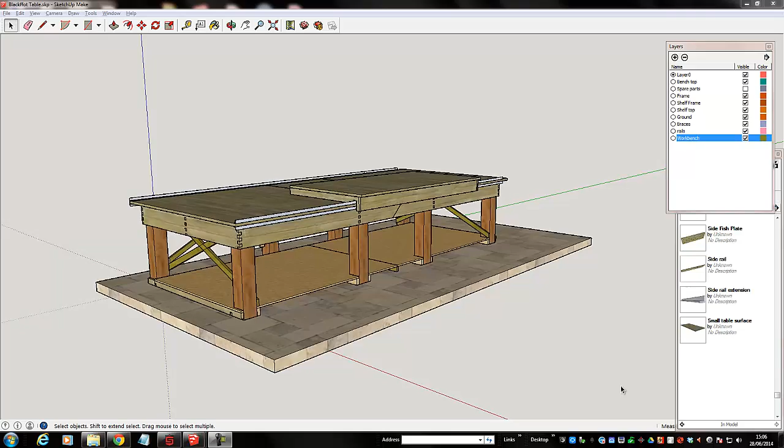I said I would send you the SketchUp model of the CNC bench we've got to build, and here it is. Fairly chunky looking thing, as you can see. The top is made out of 18mm ply. Actually, as the model stands at the moment, most of this framing is made out of 18mm ply, but I'm beginning to wonder whether that's not too expensive a way to go.

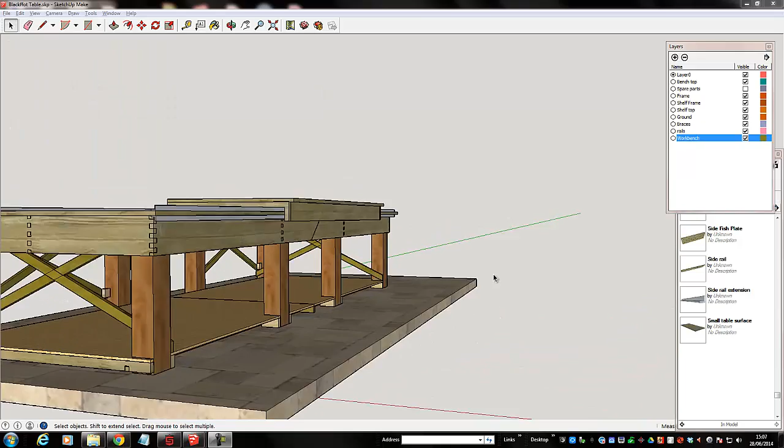A lot of it could be done with 2x1 and 4x1 instead. But anyway, I will show you the model and how it works.

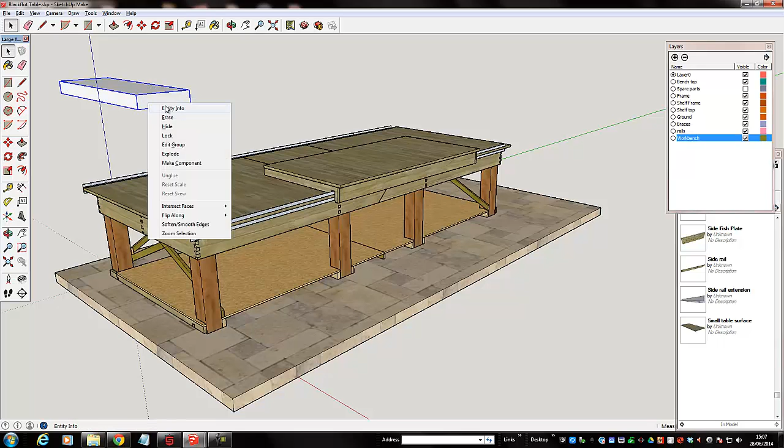In SketchUp, it's a good idea to have things in layers. You create layers, and the way you put something in a layer is if you make some sort of shape like this, we triple click it and make it into a group, which is always a good thing to do. If you then right click it, you see entity info, and down here there's a list of all the layers, and you just say I want to put it in whatever layer you want. The advantage of doing that is that you can selectively hide things.

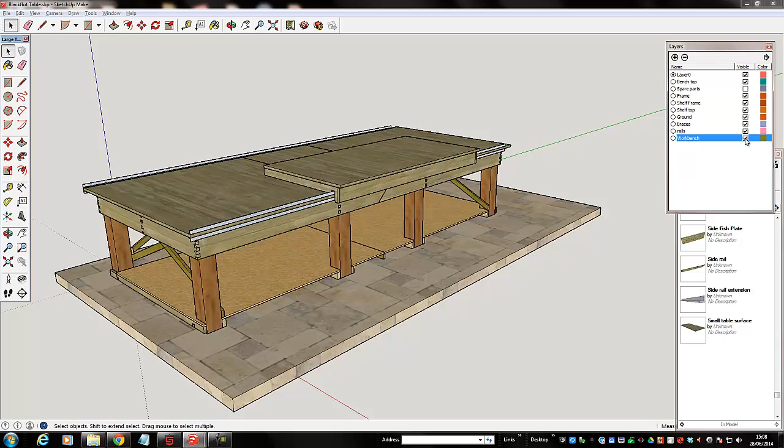One of the thoughts I had, having made this great big 10-foot long by 52 inches wide bench, is that it's a shame you can't really use that big flat horizontal surface for doing things, for fear of damaging the rails, which are pretty delicate. So I made this thing which I call the workbench, which merely sits on top, and in SketchUp you can use the move tool to move that about into different places, and then go and look underneath it and see how it's made.

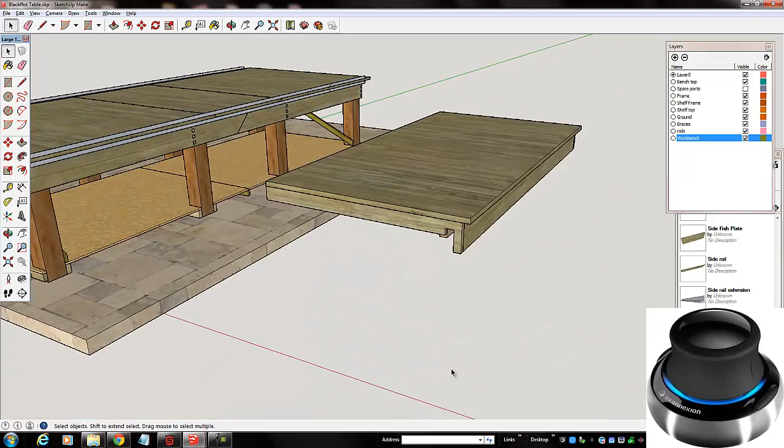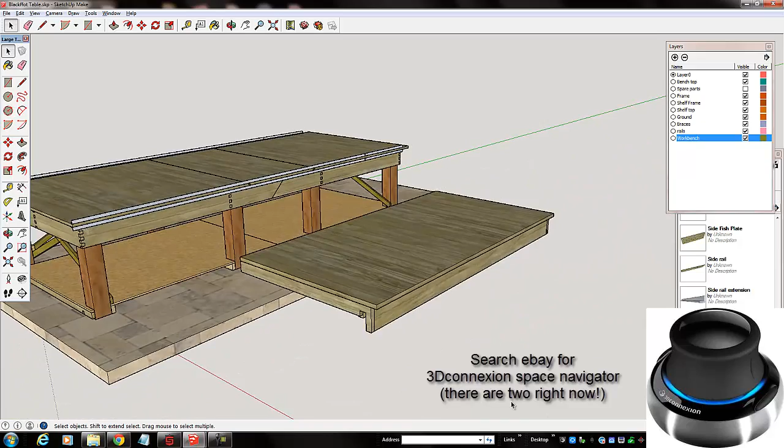I'm using a special tool here, and if you're going to do any work in this, lash out some money. I got mine on eBay secondhand - look for a 3Dconnexion 3D mouse, because all this moving around I'm doing with my left hand with the 3D mouse, which leaves my right hand free to do other things I want to do.

So I'm not going to save any of the changes I make here, so that we can go back to the original. Let me just take this apart. If I click it, the whole thing lights up. It's really important always to make things into groups - groups or components - and let me just explain that.

Let's say I make a little rectangle here, and I use the push-pull tool to make it into something solid. There we go, so I've now got a lump, and if I click it, you'll see that faces get selected, and if I use the move tool, I'm only moving the face. Let's undo that - that's the first problem.

The next problem is if I go and put a cylinder on top of that, using the push-pull tool to pull it up. Now it's almost impossible to select that other than this - I can select this face. If I triple click it, the whole thing has been selected.

In general, if you make something and you want the whole thing rather than just a face - just now when I tried to move that, if I do a single click, I select just a face. If I want to move the whole thing, I can triple click, then the whole thing is selected and I can move that around. But by putting this cylinder on top, the whole thing I get when triple clicked includes the cylinder. If I don't want that, let's delete that for a moment.

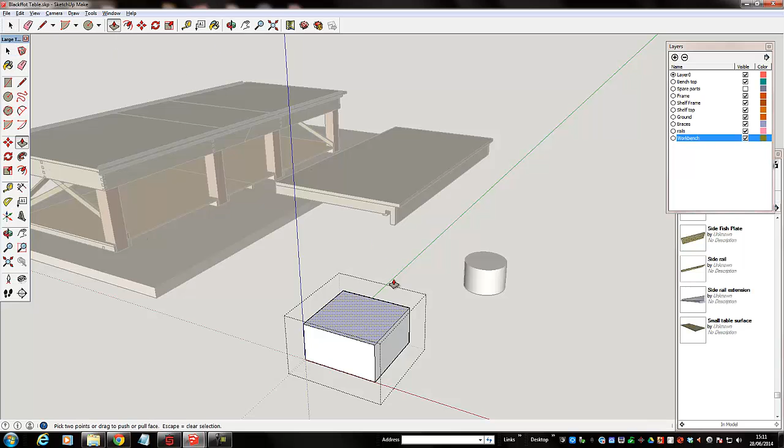If I want to, I can select the whole lot and say make that into a group, and move it around quite nicely. And if you want to break up a group, you can say explode, and now I can move this somewhere else. If I want to edit this, I can explode it, but I can also double click it, and then select individual faces and do interesting things with them, and then I could put this back on top if I wanted to.

So I galloped through that pretty quickly. The other thing you can do is make components, and a component is in effect a named group. There's a whole menu of components. You can go to Window, Components and select the little house icon, and it will show you all the components in your model. An advantage of those is that at any time you can decide you want another one, and if I find something wrong with the design and it needs modifying, if I modify it here, everywhere there's a component it will change.

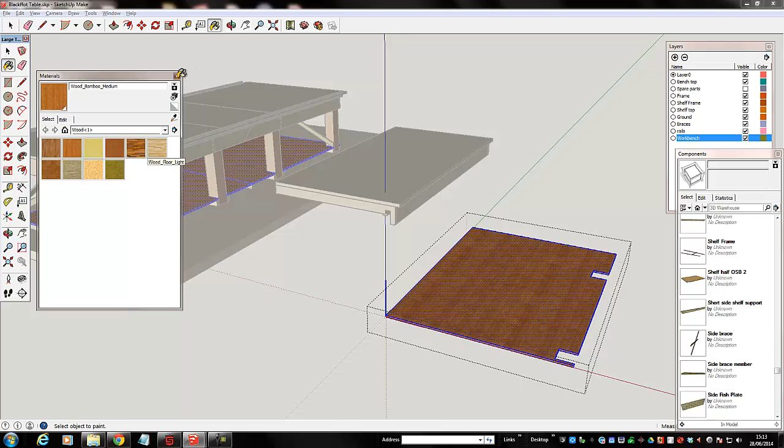For instance, these two pieces down here I call shelf halves, made out of OSB, and I can just pull a new one out. Just to give you a quick view of that, let's try making it a different color wood. Oh, I'm not editing it. And you see the color changed there - I don't want to do that, so I'll undo and go back to my OSB color and delete that one off the model.

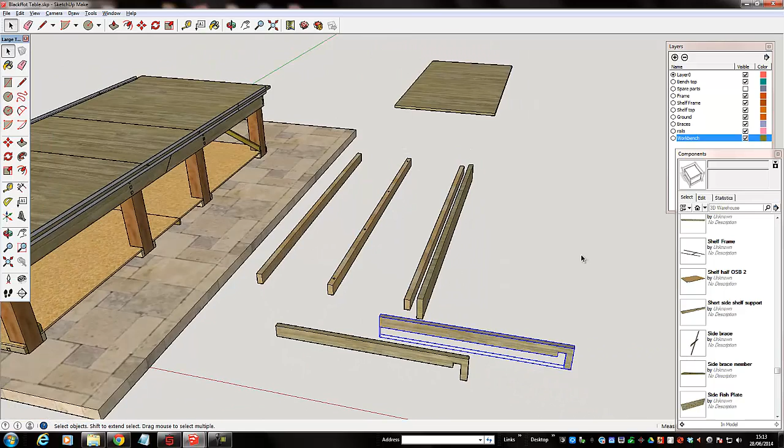So let's have a look at what we've got here. This is a component at the moment, but I'm just going to explode it for now, and now we can see the individual bits that I've got. So I can move the top away, I can grab hold of these side pieces and move those away, and see that they're two copies of the same thing. And look at these other rails and so forth. So let's undo all those moves and put that back together again and hide it.

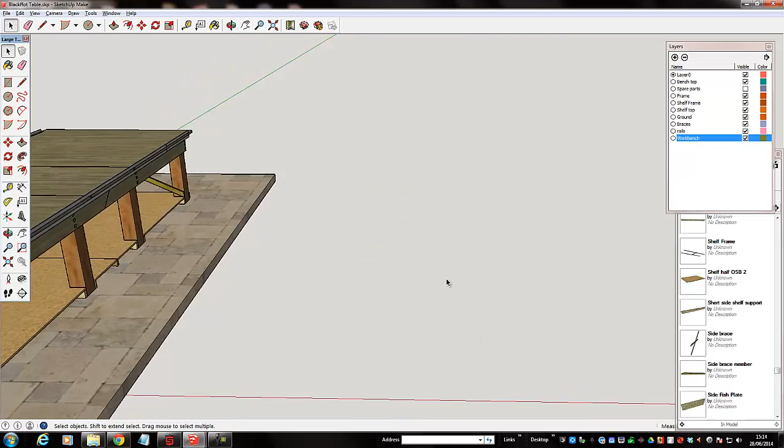Oh, that's because it's become ungrouped. Right, I'll just delete it for now because I'm not going to save this model.

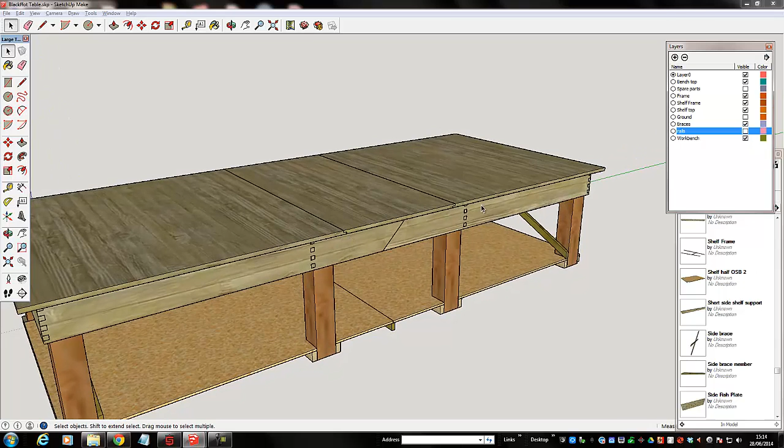So let's look at this. Let's take the ground away, let's take the rails away, and then we can see the top. And I'm just going to delete pieces here. So I've made the top in 3 pieces with this rebated connection there. And if I were to just delete that, what we can see is - oh, I'm missing one of those side fish plates.

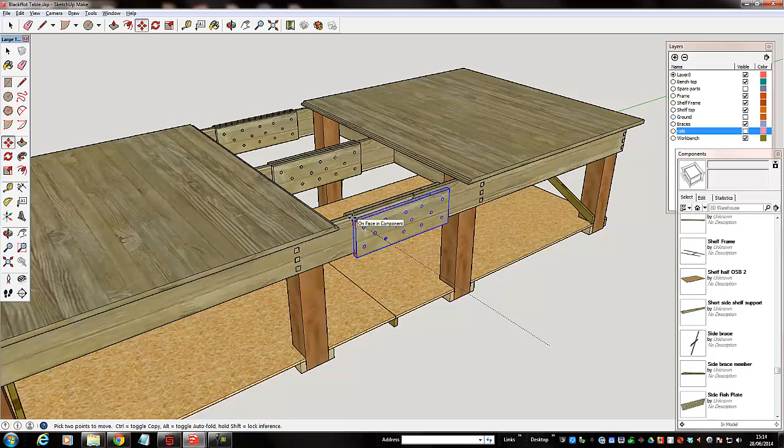Let's move that up to... come on, it's getting closer. There we go, that's better.

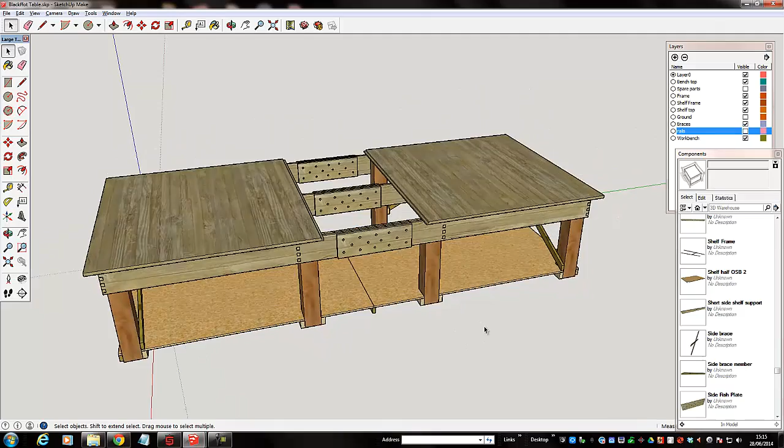I'll have to go out and get my original model and put that back. But the idea is that these are bolted together. If I take all the bolts out of there, then do whatever I need to do here, I've then got the bench in 2 separate pieces that I could move.

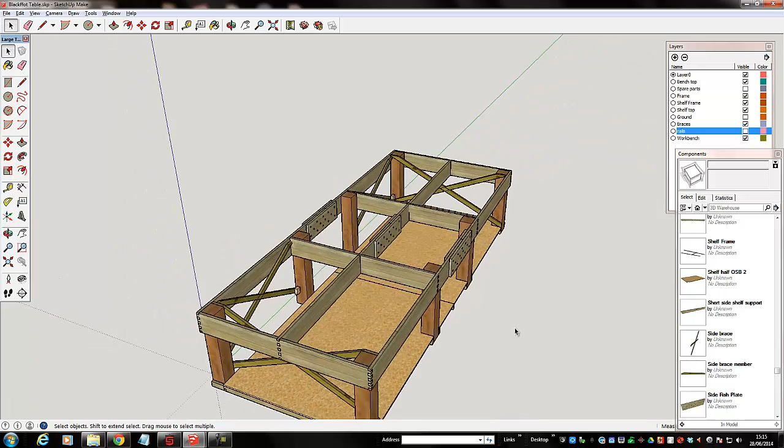Let's take the top off, and you can see the structure that I've made here. Let's explode that, and you can see how this is designed, and you could just take this whole thing apart.

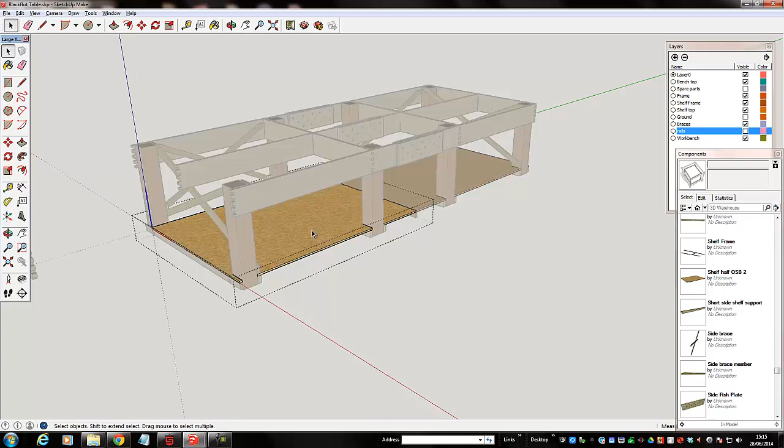Let's take off the shelf tops, and you can see the support underneath there and the way all these joints have been made. I thought I'd fixed the problem with this, and I clearly haven't, so I'll have to fix that before I send it to you. But there we are - that's the 3D model of the bench.

It actually needs to be redesigned, probably using 2x1 and 4x1 rather than 18mm ply, because I think that's probably quite expensive.

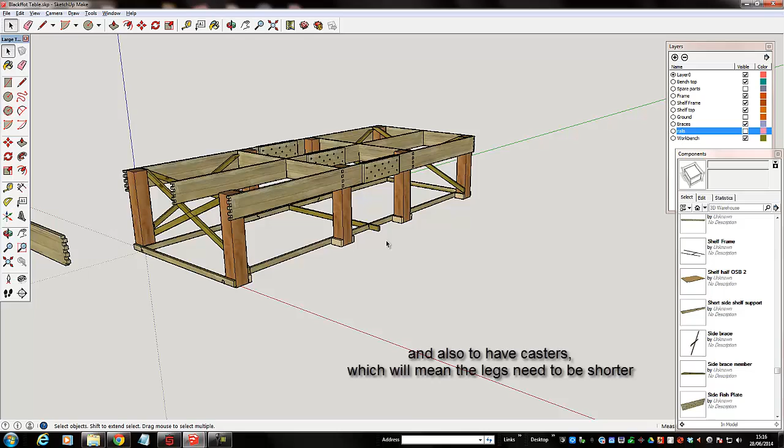But the next thing that happens after this is that you produce the cutting list, and I'll send you a separate SketchUp file in which I've taken all the pieces, rotated them, laid them down and put them onto 8x4 surfaces. These are still 3D - if you come in, you see they've got some thickness. What you do is get rid of the 3D-ness of all of these, so you take away the top face and the side faces and just leave them as 2D shapes. Then you export those as what's called DXF, and import the DXFs into your cutting software, whatever that is, to make the tool paths.

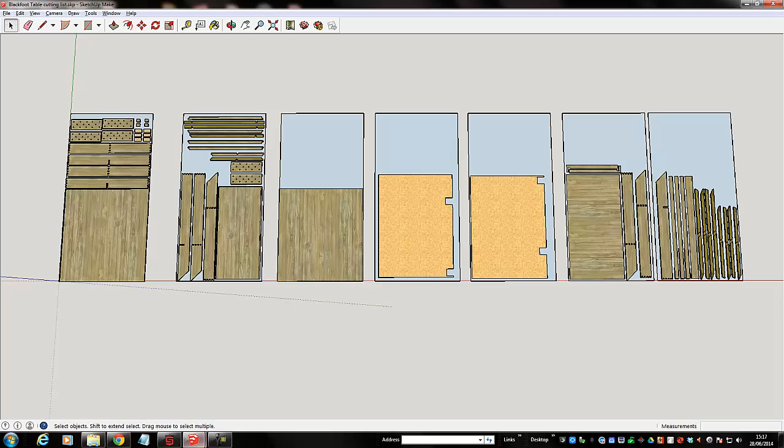So I'll leave you to play around with all of that, and I will actually send you the files once I've fixed up the problems that I've seen in them.